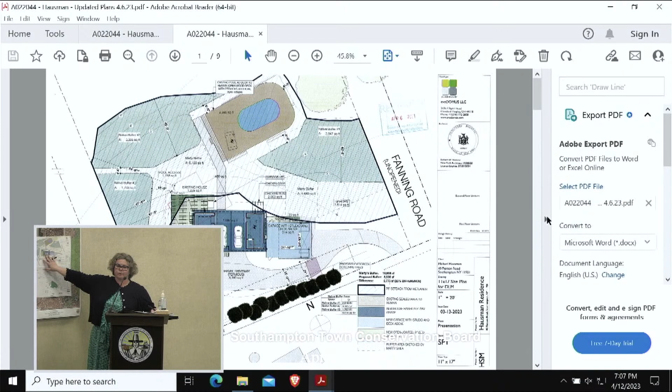If you look at this site plan, we're showing here the same residence as proposed, just slightly reoriented such that the entire residence will meet a 75-foot setback from all of the wetland boundary that's shown in this dark blue here around the lot. This setback here is a 75-foot setback.

So you can see here that the entire structure with a roof would be located 75 feet from that wetland setback. Only 152 feet of the proposed deck, which has not changed in dimensions from the previous iteration, is shown at less than 75 feet, and 20 square feet of a stairway to access a proposed deck, to access a small studio space above the proposed garage, would be within that 75-foot setback.

We had the architect draw this up for us so that we could have this for discussion purposes. Once we finalize these plans, they would then go to the surveyor to be put onto a survey.

We also are showing on this site plan a comparison of the buffer sketch that was done by Marty Shea, which is highlighted here in gray hatching. There are calculations showing that Mr. Shea's buffer was 10,808 square feet.

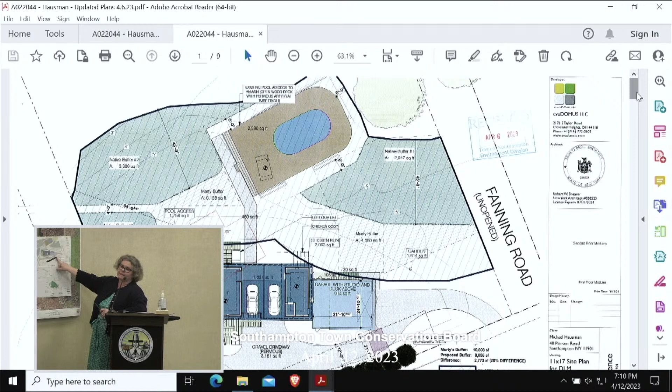We're also showing some evergreens that would be planted as a buffer between the adjacent property, which was also a concern.

With the change in angle of the house, we were also able to change the orientation of the driveway and the sanitary system. The sanitary system has some more area because the driveway can move a little bit to the north. We have this kind of sweeping driveway.

We had a circular drive here previously to accommodate the septic tank, and the leaching area was kind of pigeonholed down in this corner. So there's a little bit more area to pull it away from the neighbor and that low spot in the corner, and minimize the fill that would need to be put there for the septic.

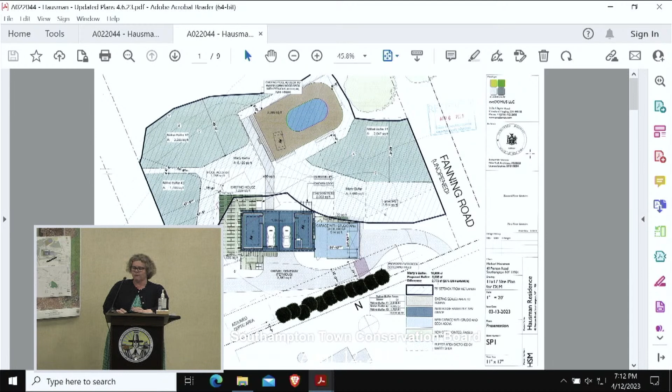What else? Because of the change in the garage and adding it to the house, there's a dramatic change in the amount of drainage that's necessary. The engineer did some research, and the Cultec drainage could actually be brought down about 6 inches from what they had originally planned. This is all laid out in the letter that I submitted, both from me and the engineer.

So with that being the absolute minimum that they could reduce the height of the drainage, that could allow for some further reduction in the amount of fill. With less drainage and less need for fill because of that change in the elevation need for the drainage, we actually reduced the fill tremendously from just under 1,200 cubic yards to 527 cubic yards overall.

Of that number, the engineering office determined that 404 cubic yards is absolutely necessary to elevate the house to the required level to get the invert necessary for the sanitary system at elevation 6. So the majority of that fill is required for the sanitary system.

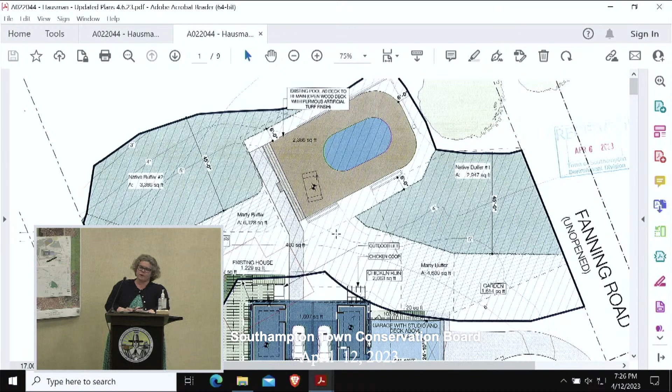Well, I think that's this part of this area here. Okay, and the owners could probably clarify that, and that's going to be more. Fenced, I presume? I'm not sure what the plan is specifically for that. Okay, maybe the owners can address that.

Were there any other questions that maybe I can answer? I do. Good evening, Marty Shea, Chief Environmental Analyst for the town.

I have had an opportunity to review the revised plans, and they're excessive for this environmentally sensitive site, and as such, they need to be further modified. First, understand that the applicant is seeking approval of significantly less wetland building and buffer setbacks than required by code.

The minimum mandated setbacks are 100 feet for construction. The building plans fall just shy of 75 feet at their closest point. And the code also mandates that a buffer 75 feet in width be established. The applicant is proposing a buffer of 45 feet in width, which is obviously 30 feet less than what's required.

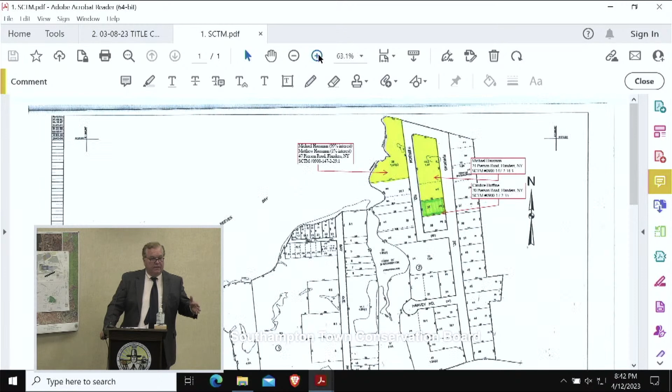The first exhibit is a photocopy of the tax map, which we saw when we first looked at the application. What struck us at the outset is the lot doesn't match up with the tax map. When I say the lot, I mean the lot depicted on the survey and the lot depicted on the site plan. If you look at what's depicted on this site plan, you'll notice right away that the entire lot's not even depicted. You can't tell from this site plan what parcel we're dealing with.

Point number 1, look at the tax map. The green parcel is my client's property, and she resides at 20 Pierson Road, Candace Huffine. The adjoining parcels, there are two of them: a 15,000 square foot subdivision lot and an adjoining out-parcel, with a dotted line running through the two parcels. Our first question was, how do you get to what's depicted on this map and on the surveys from that? We all know that tax maps don't tell us the state of title, but we were able to go to Fidelity and figure out a number of very critical issues.

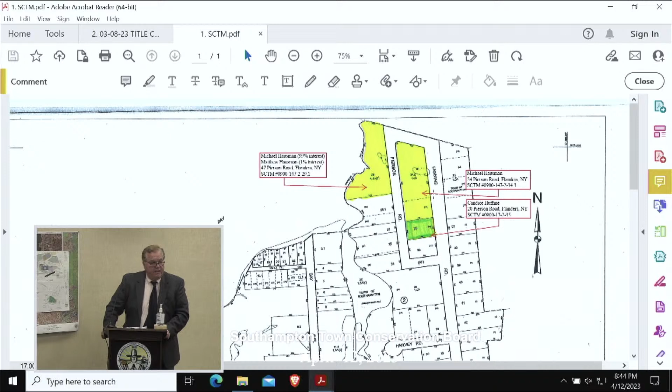If we can go to number 2, please. That's the title certification. It's certified to the town of Southampton. If we could go to number 3, please.

That's the covenant restriction that we're talking about. It contains the language prohibiting the poultry. It also contains a couple of right-of-ways that I'll get into in a moment.

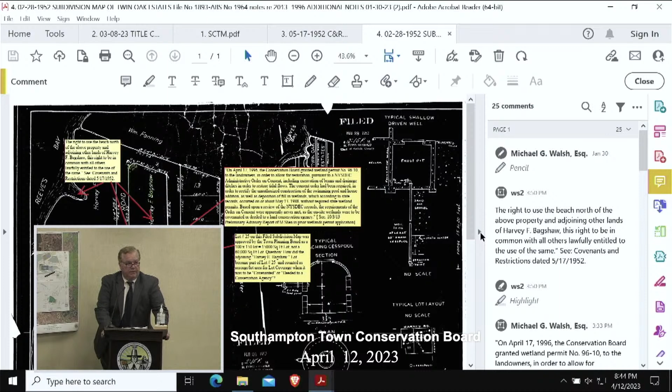If you can go to the next exhibit, please. This is a critical exhibit. Why is it important? It's the subdivision map on which the applicant's property is contained. There's a number of arrows, and you'll notice there's one arrow with a box up in the left-hand corner pointing to a lot number.

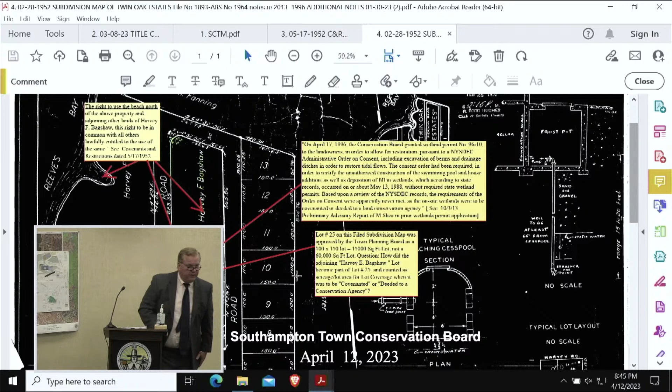If you could just blow that up a little bit, Ms. Gordy, is that possible? 24? Thank you very much, Mr. Hine. Number 24, that's my client's property, and adjoining it is lot number 25, which is the subject parcel, part of the subject parcel. Somehow lot number 25 was merged with that parcel with the name Harvey Bagshaw on it. How did that happen?

Well, it apparently happened at or about the time that this swimming pool was built. Apparently it was built over the line or on the Bagshaw parcel, which was owned by a different person than the owner of lot 25, and that's all in the title work. As a consequence, the two parcels were merged.

And that's under our code, that's called a re-subdivision of land. When you merge two parcels, unless you fit one of the exemption provisions in the subdivision regulations, that's called a re-subdivision. In order to re-subdivide joint parcels that are on a subdivision map, you have to go to the planning board for approval. Never happened in this case.

The second thing that happened, which gives you this configuration—which we don't have in a survey right now on the board—is that lot 25 and the adjoining lot 29 decided to abandon Pierson Road, adjoining their property.

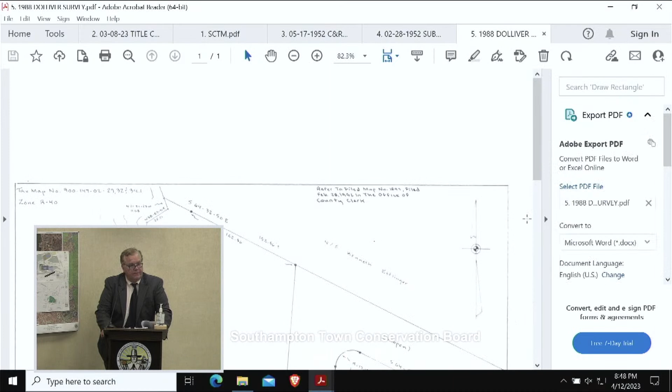Because what happened here, this pool construction, the large deck out there adjoining the wetlands that everyone's been talking about, was built without any permits whatsoever. No building permit, no zoning variance, nothing.

The DEC violated the then owner. They entered into an order on consent. There was a $3,000 fine paid according to the documents that we put into the record.

And there was an agreement that all of the wetlands, including most of that Bagshaw lot that we saw on the map, which is pretty much all wetlands, would be conveyed to a conservation organization or the town of Southampton. That never happened. They never followed through with that.

We don't have a copy of the zoning board of appeals variance file before you. I don't know if there are any conditions associated with the grant of the side yard variance to keep the pool in its present location. I think you have to have a look at that.

So we've got the poultry prohibition. We've got this configuration of a lot that somehow was created, we don't know how, because it's never been explained in this application. It's never been disclosed to you by way of a title certificate, or any title work for that matter, as to how this was all created.

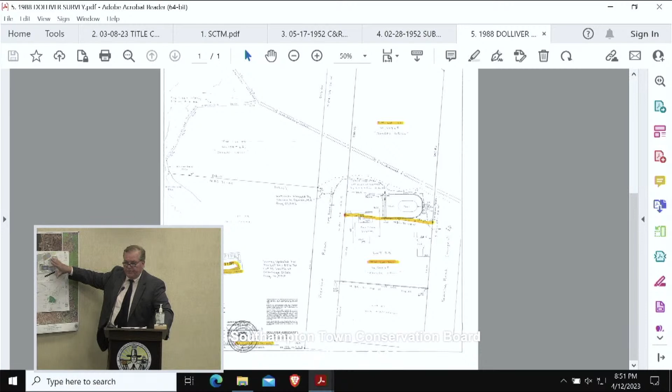And you wouldn't be where you are today with all this array of improvements, the largest structural footprint, probably by 2.5 to 3 times of any other lot in the neighborhood. And when I say lot in the neighborhood, if we could go back to that subdivision map for a moment, please. I think it was number 4. Yeah.

Again, if you look at the lots in this neighborhood, particularly the interior lots, they're 15,000 square feet. Somehow, this lot's been bootstrapped apparently to 60 and change, depending on what survey you read. This really doesn't tell us how big the lot is. It doesn't even depict the entire lot, this site plan.

The other thing that's very important is when that road was abandoned, the rights of all the lot owners, which was granted by the covenants and restrictions, to access the beach at this location, to access the water to the north of the Bagshaw lot, as it's described in the C&Rs, was essentially cut off. Because if you abandon the road and you deed one half of it to one private owner, the other half to another private owner, you've eliminated the roadbed. And they essentially cut off access to that beach, which was granted to all the lot owners in the subdivision C&Rs.

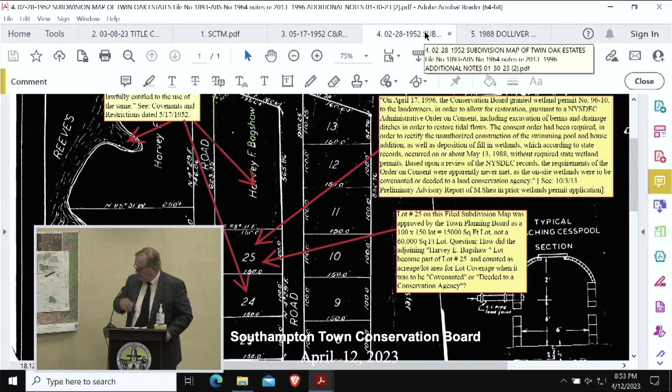So you don't have any access because of the abandonment of the road. What about Fanning Road? Michael, that goes right through that subdivision. The easement was granted over both Fanning and Pierson Road, okay, depending on where you live.

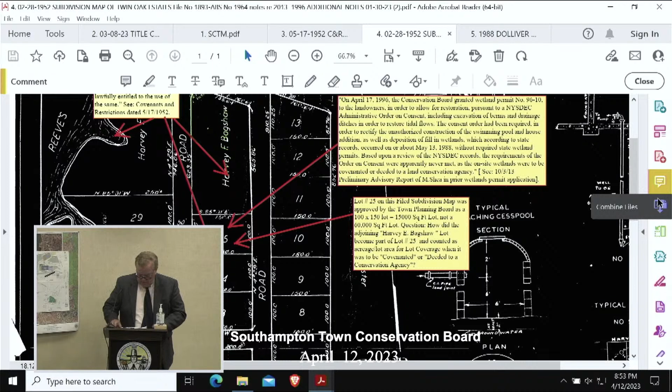Which, by the way, brings me to my next point, Mr. Hine. If you go to, bear with me, exhibit number 6, I believe. Oh, that's the ZBA's decision, just go to 7, please, I'm sorry.

No, that's the order on consent. Next one, I just can't see my list. Okay, the last exhibit it would be then.

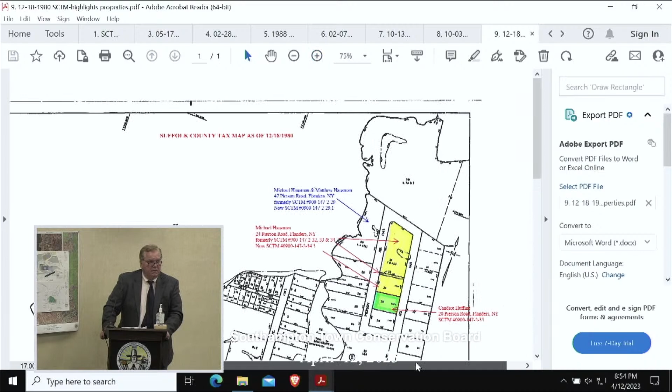Yeah, if you can blow that up a little bit please. What you'll see there is interesting because right above that subdivision lot is a little strip of land. See the light green? That's the lot in question.

There's a strip of land 10 feet by 100 feet that travels along what's now the Hausman lot, and between that and the Bagshaw lot, which appeared to connect up Fanning Road with Pierson Road. I think it would be logical to believe that the 10-foot path was to get the people on Fanning across to Pierson and then down to the beach, because when the developer subdivided the property and marketed the lots, the scheme of development was such that you could get to the water.

So we question at the outset the configuration of the lot, how it was created, and whether or not your board even has jurisdiction to grant the setback depicted on this site plan. They're showing a 30-foot front yard setback. We know Pierson Road is the front yard. That setback is really 5 feet.

If you peel back the layers and look at what went on here, you've got a 5-foot setback from the corner of the house. We're willing to move forward before the ZBA, the planning board, whatever forum we can get, to prove this out. But we're pretty confident that this lot, as it was created, certainly is not configured as depicted to you in the various documents that have been filed.

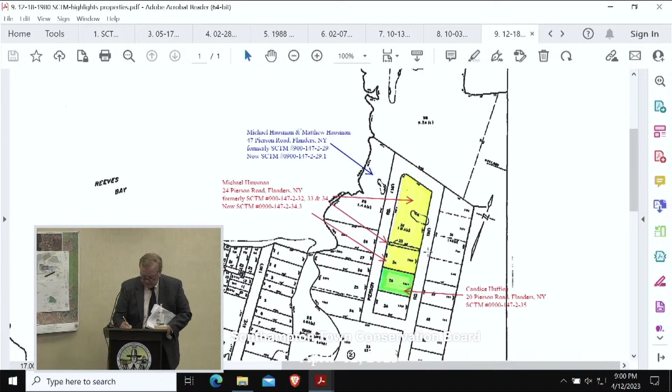Yeah, I just have one question. I'm not sure where you want to go with this. We want the application denied, period, at the end of that sentence. We want the application denied, and we'd like the lot to be returned to its legal status, okay?

It may be that at the end of the day the original subdivision lot and the Bagshaw lot will be merged, but that usually comes with conditions. How would you go about doing a re-subdivision? Would you have to take... what would you do if you were handling the application? How do you plan to accomplish this?

Accomplish what you're asking? The denial of the application? Yeah, by building my record before you and having your good offices review all the materials that we submit, and make the appropriate determination, which I suggest to you is that this application should be denied. That's how we do it.

Because what I've seen here is you've got things missing. They have not been filed, even though we asked for them, between February and today. A title certificate is basic, zoning application 101. If you have covenants and restrictions, you've got to attach them to your application. I don't know how you argue about the chickens when you've got a title report that calls out a prohibition on your lot against the keeping of poultry. That's a simple one, but that was never done in this application.

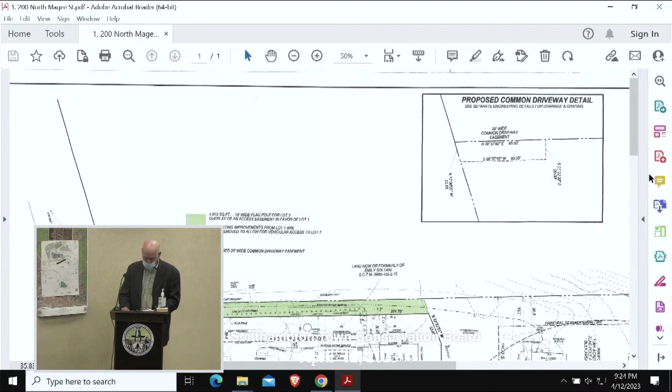Advisory report for the planning board: subdivision map at 200 North Magee Street, a pending subdivision for a track on North Magee Street in Hampton. There are several recommended comments. First, the track for which two-lot subdivision approval is sought is presently developed with legally existing single-family residences. It abuts a large block of forested land to the east, preserved by the town. These woodlands once extended into the subject property but were largely cleared and removed between 1994 and 2001, leaving remnants along the southerly portion of proposed Lot 2.

Second, as the subdivision does not increase residential density, the Conservation Board has no significant objections. Third, consistent with the Conservation Board's August 11, 2021 advisory report, a conservation easement needs to be established over the remaining woodlands on Lot 2, as this wooded area contains slopes in excess of 15% and abuts a protected natural area and essential wildlife movement corridor on the adjoining Suffolk County Water Authority property to the south. Establishment of the easement will also help safeguard the existing public well pump station.

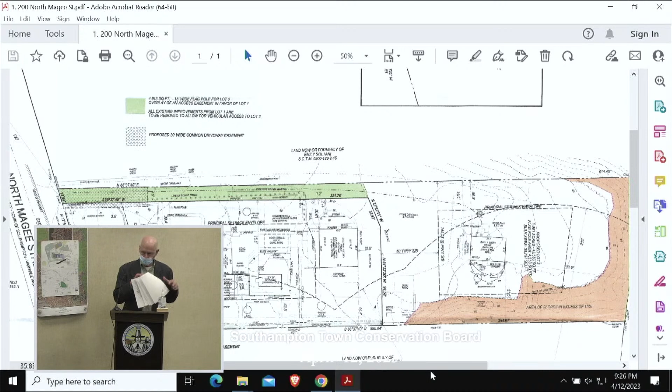Motion to send those comments to the planning board. Second. All in favor? Aye. Opposed? Francis E. Mulvey subdivision.

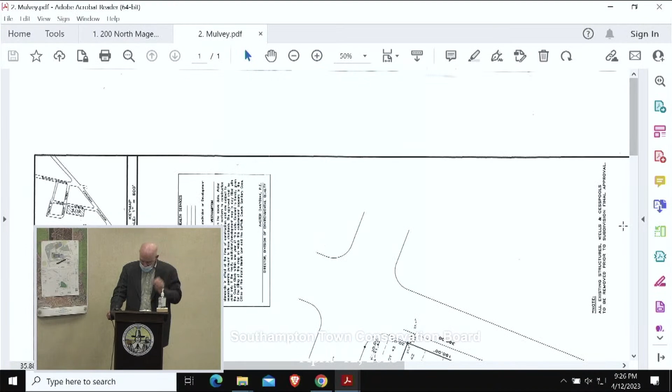This is a subdivision in the pre-application stage for a wooded tract at Percy Avenue in West Hampton. The first comment indicates the subdivision would affect the forested tract and county-mapped watershed lands for Beaver Dam Creek. These woods are vital to protect water quality and replenish groundwater, and also aid in cleaning the air through carbon sequestration and help sustain local flora and fauna biodiversity. Second, clearance standards should be adhered to, with allowable site disturbance limited to the existing clearing on Lot 1 and 50% of Lot 2.

Third, the track is located within 1.5 miles of a documented summer occurrence of the federally endangered northern long-eared bat. As such, the applicant needs to contact the DEC for guidance on tree removal and any other habitat protection measures that need to be adhered to. Any special requirements established by the DEC need to be noted on the subdivision map.

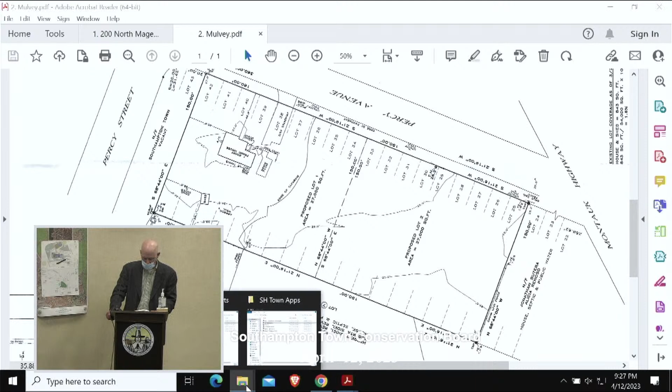Motion to send those comments to the planning board. Second. All in favor? Aye. Opposed? Alec Hufnagel, a subdivision application in pre-application stage for a property at Little Noyack Path in the hamlet of Watermill.

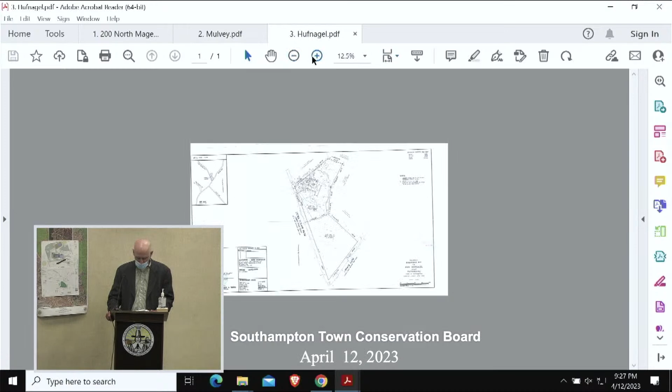There are several recommended comments. First, as the forested land which will be impacted by the proposed subdivision is partially cleared and developed, and located in the Aquifer Protection Overlay District, the entirety of site disturbance associated with the shed, garden, pool equipment, and access paths needs to be shown in the survey together with revised clearing calculations.

Second, if the clearing on proposed Lot 1 exceeds the allowable limit per section 330-67, the applicant should be required to reclaim and revegetate a sufficient amount of area to bring the lot into compliance. Third, the required clearance standard for proposed Lot 2 needs to be noted on the subdivision map.

Fourth, in order to preserve community character and the scenic corridor along the adjacent roads, the map needs to be revised to provide conservation easements extending 25 feet from Little Noyack Path and 50 feet from Noyack Path. Fifth, the driveway and fence encroachments along the northerly lot lines need to be addressed.

Sixth, the survey needs to identify the existing fence heights and note whether the fence lines need to be modified to comply with section 330-109A, subsections 1, 2, and 3.

Seventh, to prevent interference with wildlife movement and avoid risk of wildlife injury, all fence lines should be located outside of natural vegetation areas slated for protection, to comply with section 330-67.

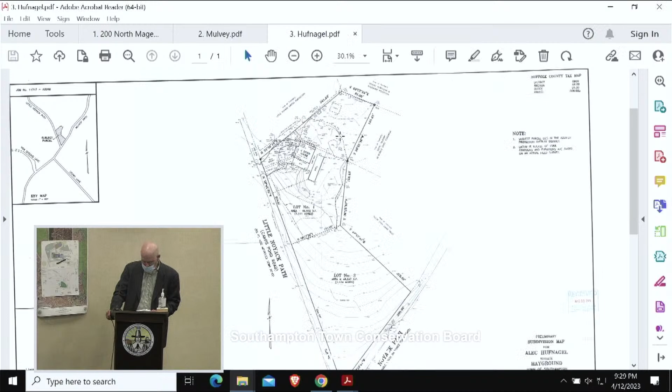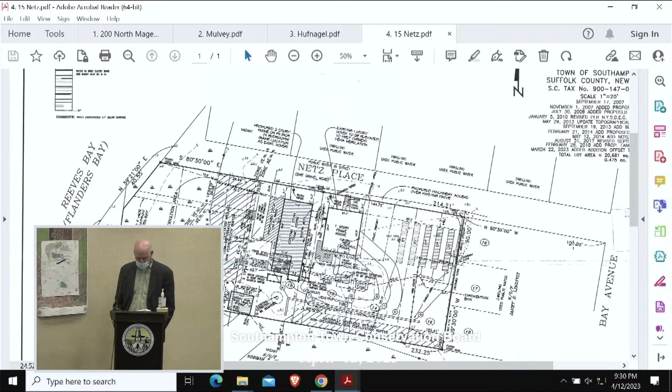This pending application for property line pyramid and non-conforming use expansion variances is being sought for a property at Netz Place in Flanders. The property fronts on Reeves Bay, contains town regulated tidal and brackish wetlands. It also abuts county preserved land and lies within the limit of moderate wave action. Thus, VE building standards need to be adhered to. The second advisory comment provides some history regarding a Conservation Board permit recently issued to allow for demolition and replacement of the hurricane-damaged waterside dwelling, as well as renovation of a second dwelling and construction of elevated decks with a new I/A to be installed. The approved survey is referenced. Thirdly, it's indicated that the survey submitted to the Zoning Board of Appeals is consistent with the survey that was approved by this board.

And as is customary, the last comment indicates that the separate zoning variance issuance criteria have not been reviewed as part of this advisory report. Motion to send these comments to the ZBA? Second. All in favor? Aye. Opposed? Gerard and Ellen Perino.

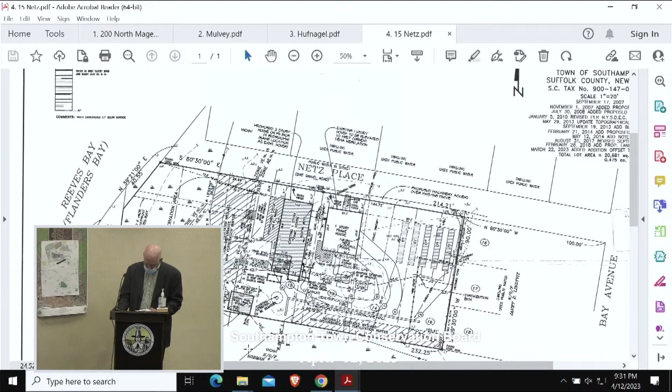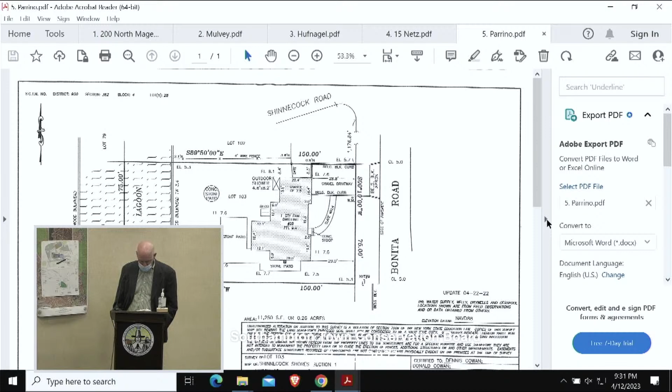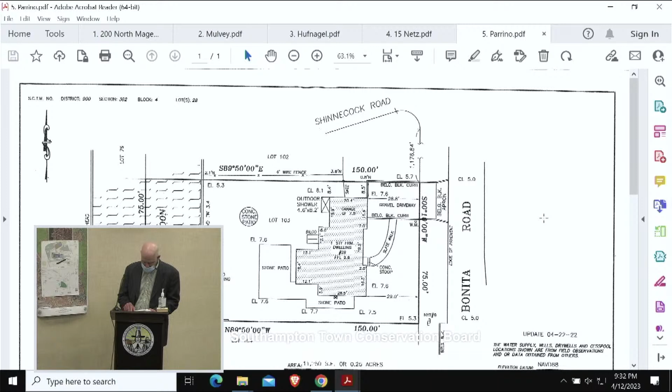This pending variance application, which seeks relief from the pyramid law, relates to a property in Shinnecock Shores on Bonita Road in East Quogue. The premises fronts on a bulkheaded canal whose waters are regulated as tidal wetlands. The lot also lies within the town's high priority water quality improvement zone. Second, it's indicated that the planned second-story residential addition, as depicted on the survey submitted to the zoning board, is eligible for a letter of non-jurisdiction pursuant to Chapter 325. However, it's indicated there are unauthorized stone patios on the property that need to be legalized by filing a Conservation Board wetland permit application. The last comment indicates that the separate variance criteria set forth in the town building and zoning code have not been considered as part of this advisory report.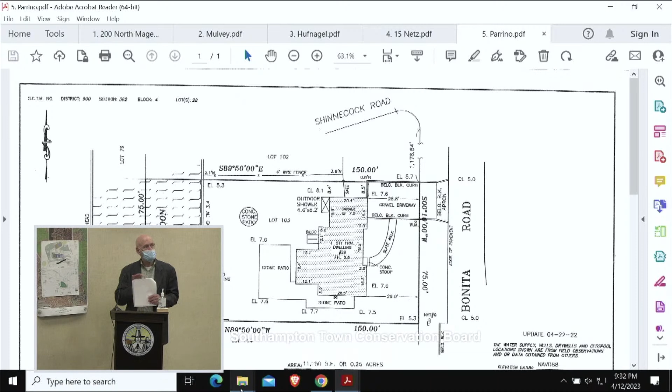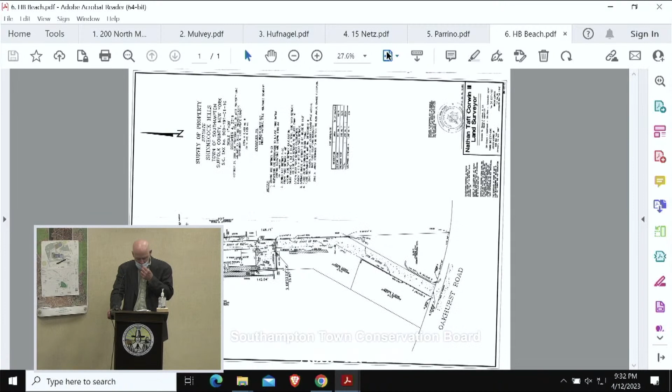Motion to send these comments? Second? All in favor? Aye. Opposed? HB Beach House. This is a variance application submitted to the Zoning Board of Appeals for a property at 23A Oakhurst Road in Hampton Bays. The first comment indicates that the property has frontage on the Great Peconic Bay, contains town and state regulated tidal wetlands. Second, some history is provided regarding a letter of non-jurisdiction that had been issued pursuant to Chapter 325 for a fence line.

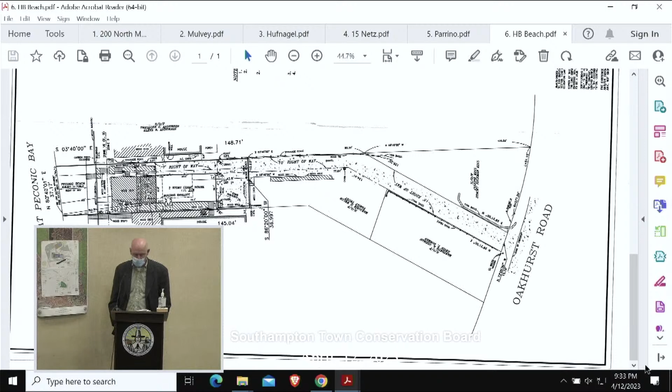Thirdly, it's indicated that the planned second floor deck, as shown on the survey filed with the zoning board, is also eligible for a letter of non-jurisdiction. Lastly, it's indicated that this board has not reviewed the separate zoning variance criteria as set forth in the building and zoning code. Move to send the comments? Second. All in favor? Aye. Opposed? Administrative wetland permits are in your packets.

Resolution of conditional approval, A 02-1081, 658 Flying Point LLC. Any discussion? Move to issue? Second. Resolved that a conditional wetland permit approval is granted to 658 Flying Point LLC for the proposed project upon the terms and conditions set forth therein. All in favor? Aye. Opposed?

A 02-3003, 46 Oakhurst Road LLC. This is postponed until April 26th. Motion to postpone to April 26th. Second. Second. All in favor? Aye. Opposed? A 02-2028, Denise Sucklich.

Also postponed to April 26th. Motion to postpone to April 26th. Second. All in favor? Aye. Opposed? A 02-2070, Laura McKenzie.

Any discussion? Move to issue. Second. Resolved that a conditional wetland permit approval is granted to... let's see, okay, I got these mixed up. Yes, Laura McKenzie, for the proposed project upon the terms and conditions set forth therein. All in favor? Aye. Opposed?

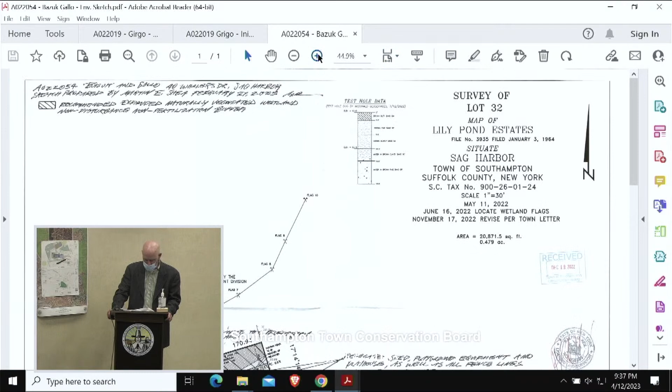This application relates to an existing residentially developed property on Whalers Drive in Sag Harbor. There is a preliminary advisory report on file dated February 27, 2023. The application has been made to legalize or rectify various unauthorized improvements, to expand the existing home, to address accessory improvements on the property, and to bring the property into compliance with an existing covenanted buffer, the wetland permit issuance standards, and the Aquifer Protection Overlay District clearance standards. The applicant has requested that a public hearing be held in order to provide full opportunity to present additional information.

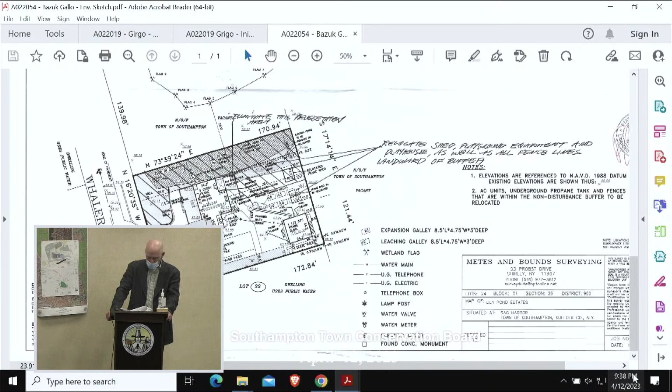So there is a resolution before you to schedule a hearing. Motion to schedule a public hearing for May 24th. Second. Resolved that the Town Conservation Board hereby schedules the public hearing for May 24th, 2023, and that notice of public hearing be published in the town designated newspaper pursuant to Chapter 325, Section 325-8C of the Town Code. All in favor? Aye. Opposed? A022054 Paul Bazuk. A022082 Erlinda Bildner.

This is postponed to April 26th. Motion to postpone to April 26th. Second. All in favor? Aye. Opposed? A023008 Michael Sonnenfeld.

This application relates to a property on Mecox Road in Bridgehampton. There is a preliminary advisory report on file dated April 6, 2023. The landowner is seeking this board's approval for residential redevelopment of the property. There are various issues that need to be addressed regarding activities that are not compliant with an existing covenanted buffer established by this board. Portions of the property also need to be reclaimed and restored to natural vegetation. The applicant has requested that a public hearing be scheduled.

Motion to schedule a public hearing for May 24th. Second. Resolved that the Town Conservation Board hereby schedules the public hearing for May 24th, 2023, and that notice of public hearing be published in the town designated newspaper pursuant to Chapter 325, Section 325-8C of the Town Code. All in favor? Aye. Opposed? A023010 Margot Carr and Dana Robinson.